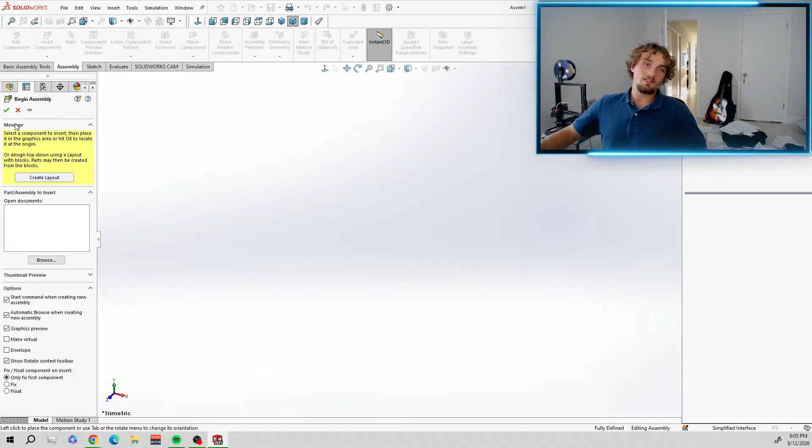Okay, so let's go into assembly. It's taking forever. Let's go into assembly, open it up. Into the assembly, come on. Alright, I don't want to open anything, I just want to open a new file. Here we go, finally, okay we got this open. Let's see, maybe we can begin sketching on the planes and begin assembly. Create layout, open documents, create layout.

Right, for a sketch, right? Sketch, evaluate, and then that's how we do it. See, like, where's the feature to... No, I just ain't seeing it, I ain't seeing the point where you extrude. It doesn't make any sense, and I'm sketching right now. No, I haven't clicked it yet.

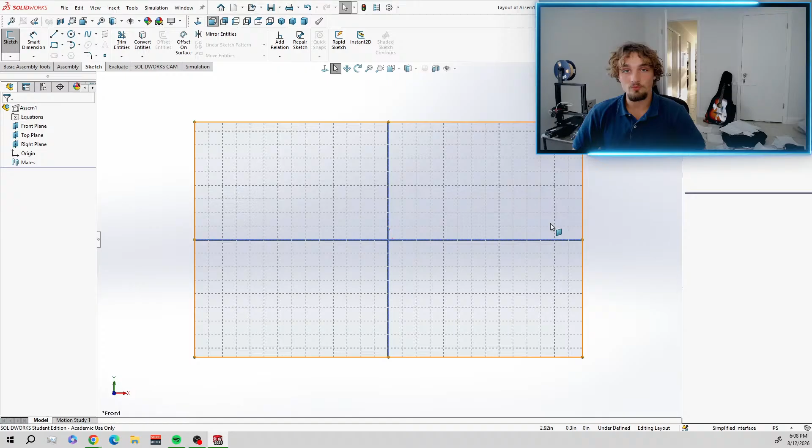Should I separate this part into a build, or separate this build into parts now? Because I'm gonna have to make it an assembly of many different parts, right? Because my 3D printer—I just want to 3D print everything, I guess. It's the fastest way for me to model and iterate. It may take some time, but to go through many iterations, it will be the fastest. Oh man, okay, oh wait, but that's the thing, is that we're gonna do this. Oh wait, never mind.

Holy smokes. What the... in SolidWorks?

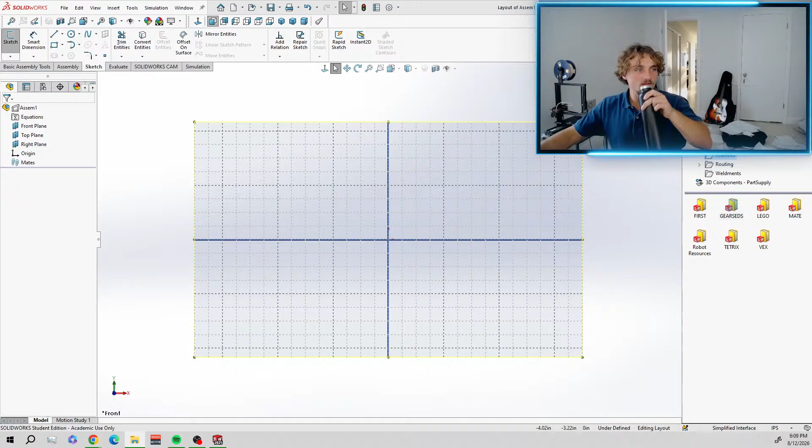Extract all. Wow, look at this stuff.

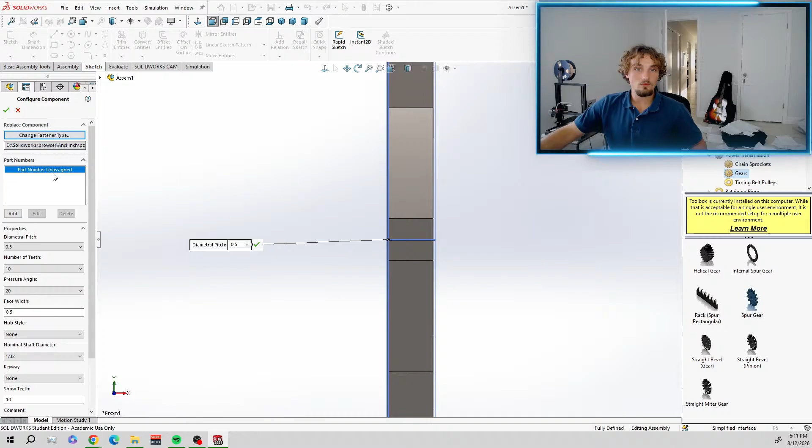I guess I need a body though. Well, then that's what I could do. Configure component. Yeah, okay. I just gotta see if it's gonna save as a part or what's gonna happen here. Yeah, sure, I'll take another one.

See, it's just an assembly, and then we have... see, like, why is this happening? Delete. See, that's what happens. What am I doing wrong?

In the assembly, it's a new part. Give me a new part. Front plane. File, new part.

You guys, make drawing from assembly. Okay, let's ask AI. Come here, motherfucker. How do I make a new part within an assembly? Open your existing assembly file, go to assembly tab in the command manager, click the drop down, blah blah blah.

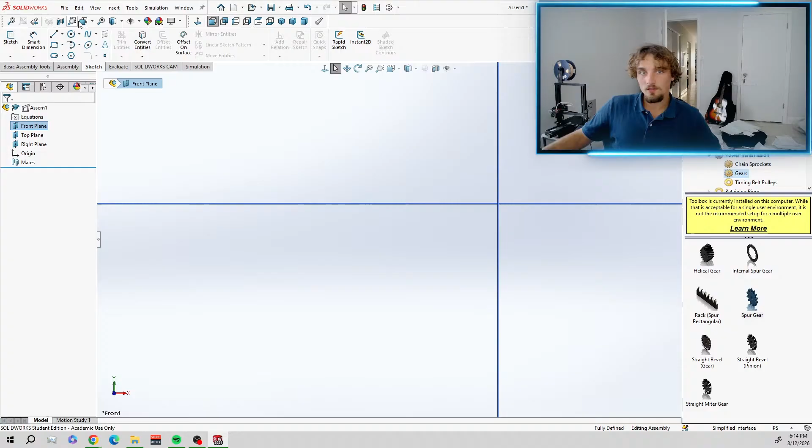Okay, let's give this a shot. Let's see what happens here. So first I'm gonna insert one.

Basic insert component, here we go. Browse assembly, don't mind that. Yeah, that's it.

Alright, now that's it. It needs a part to anchor, and therefore that was our anchor part.

Oh, whoops, that's right up in the mic. My bad. Alright, I'm feeling good now.

I'm feeling good. Okay, we're gonna add this little spur gear up in here, and we're gonna hope that something nice happens.

Look, that's a part, this isn't. What is that? Is it gear? Wait.

Well, okay, let's see what this does. When in doubt, screenshot it out.

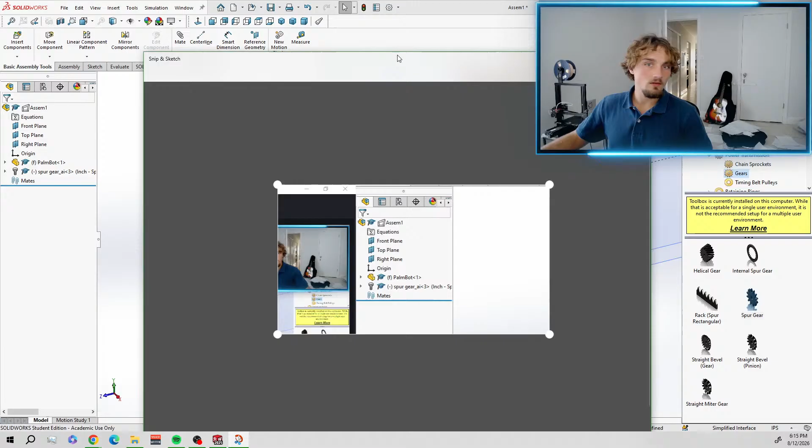Oh no, I got myself in there. Oops, let's just crop that. I don't want to be in there. I don't want to be in the picture. I don't want anything to do with it. There, alright, let's copy that.

Let's take this to AI. Say hello. What's the bolt icon for the gear?

I want to use the, what is it called... the toolbox, and the inch power transmission.

This is a standard SolidWorks toolbox component pulled from the built-in hardware library. Even though your component is a gear, not a physical fastener, the bolt screw icon represents all standard toolbox hardware, including gears, bearings, washers, and keys, to differentiate them from custom parts you design yourself. How to use toolbox.

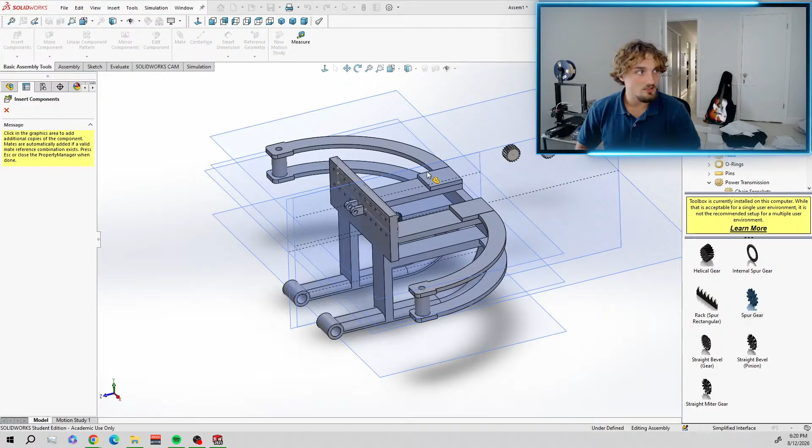Perhaps it's not good though, that's not a good idea for the arms. Maybe I should look to make those out of other material.

Maybe that would be the test, in order to make something strong enough out of a weaker material. Maybe that is the ultimate engineering test. I actually kind of like that. That does seem much more of a challenge.

Okay, we have our gears in here. We need to get to modeling. I don't know why this won't leave my screen. There, okay.

Maybe I should go through some YouTube videos. I have an idea, I have a very good idea. What time is it though? I don't know. I kind of need to get going a little bit, but I also have a very good idea for some new videos, some new content.

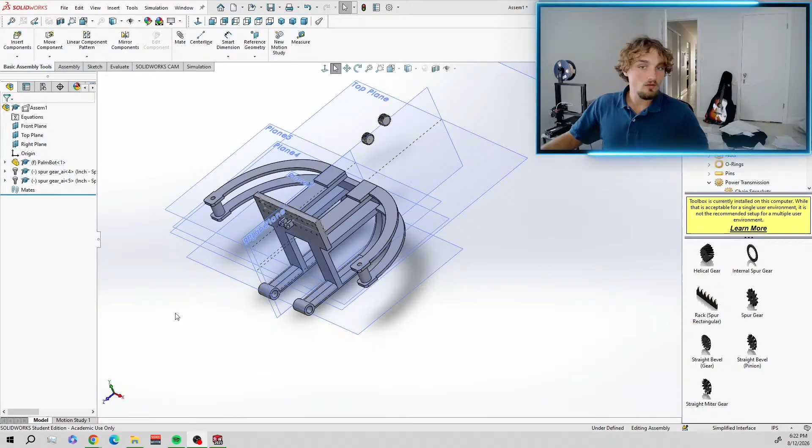Alright, whatever. I mean, jeez man. Let me see what's happening. Nothing. Cooked. Absolutely cooked. Yes, okay, okay, okay, okay.

Alright, what are we gonna do next? We must move forward, we must progress, we must persevere. The helical gear.

We also need one of these. Now this is something that has to be exact. So pitch diameter 12. This needs to correspond directly to the same, well, I guess diametral pitch. Would that be true? I think that would be true. Pressure angle, face width, pitch height, face width. That's probably good enough.

Yeah, we need to. Oh, that is true also. And they've gone missing, my guides have gone missing, my linear guides. That's okay, we'll get them back. But I also made the... trying to think of how I would use the word fallacy in that sentence, but anyways, I failed to separate the parts, the guide from the rail, I guess you could say. So they were stuck together. So when I try to perform like a drag to experience the motion given the constraints, it was entirely the guide was itself, the sled to the rail type of thing, the cart to the rail type of thing. The guide was locked, so it didn't slide along the rails. That was a big issue, but we can correct that now.

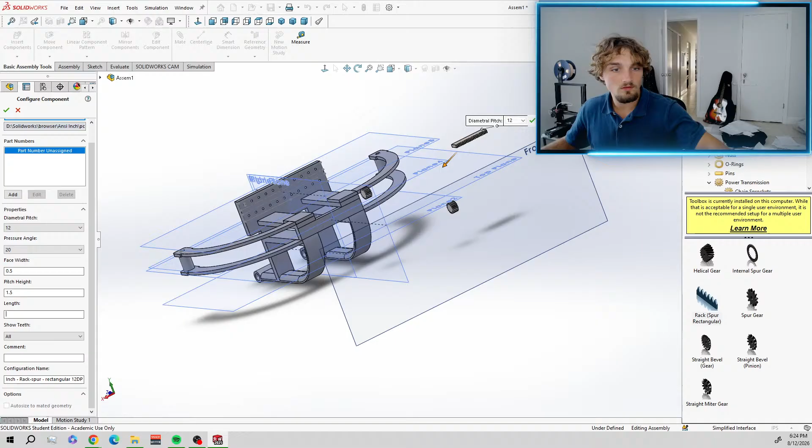Length 6. 12 would be a foot. 18, 24. Yeah, that's probably ideal. Okay cool, I think that's good.

Insert a component. Okay, this is going to be SolidWorks, the internet models, rack and pinion. Rack and pinion, no, not true. Linear guide rail, chamfer, body. Oh okay, yeah. Well technically I need two of those. Guide rail, chamfer. No, that consists of everything, I don't want that. Chamfer. That's it.

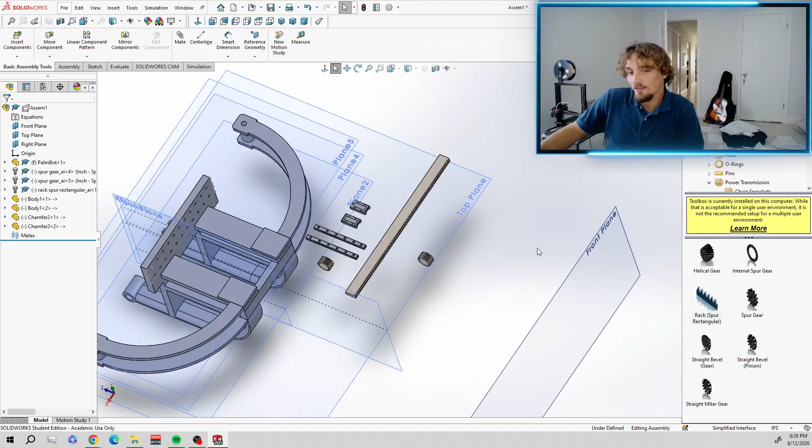Perfect, okay. It's pretty much all my parts. Wait, I think we can get this done, except for the fact that I don't have somewhere for the gears though, that's gonna be an issue. It's okay, I can assemble a part for that, actually, or just build a part. So after we do that, yeah.

We probably have axles here. Pins. Not like that. Bearings. Structural members. Wow, very nice.

I can't at all tell what size that is. Well, what? Oh shit. Did not hang out, didn't stick around. Okay, alright shit, what do we need to do now?

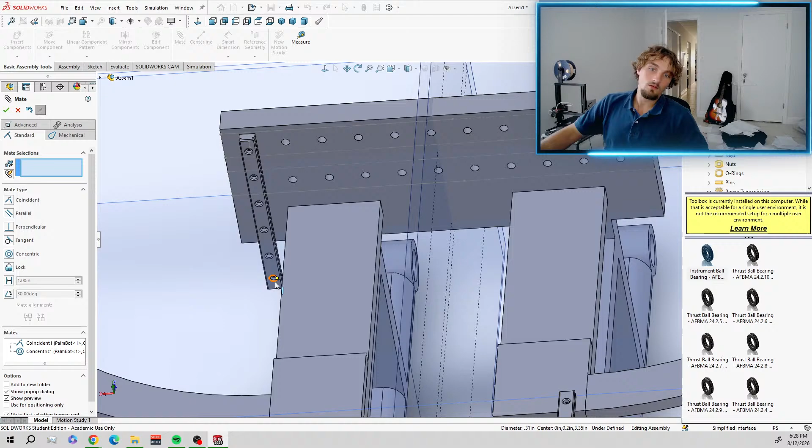Okay, so now I need to make some mates. I can definitely make a mate with this guy. Give me a mate. Let's see, I want to put this face against this face over here, just slap them right together. Yep, okay, I want to put this hole concentric with this hole. Yeah, let's do that, this hole can be concentric with this hole. Yep. This, I mean, I can just simply go this hole with this hole. No, does that work? That works. Concentric, that's good. Bang, alright, perfect.

Time for this guy, mate. Let's do the face, I want to put your face against my face. I mean this face. Dino. I want to check that. I want to make this hole and this hole. Wait, I could do that. Concentric. Do it. Oh my bad. And this hole and this hole. Concentric. Yes, yes, can I not do that?

Yeah, nah, I must have messed up before. Whoa, whoa, whoa, but I can't go forward?

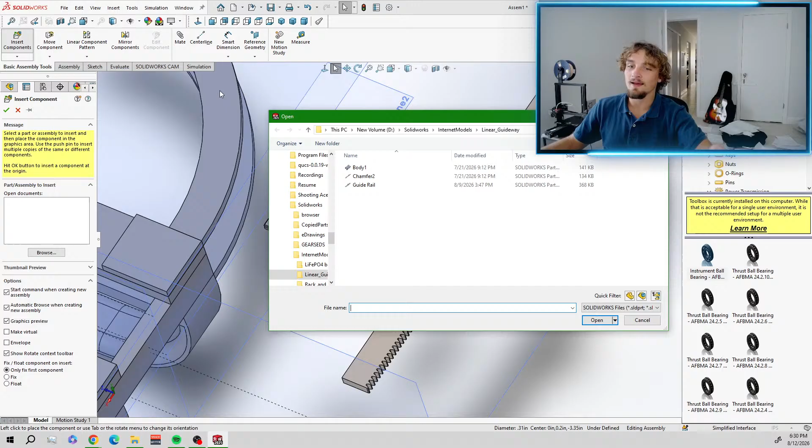Oh, that honestly really pissed me off. That's some stupid ass, that's a dumbass function right there. Why would they even, oh you asshole. Did it again, you asshole. Why wouldn't they even, why would they do that, implement that as a function? Why even have this button here? What's that button for? Obviously not this. What's going on here? Truly, what's going on here? Cat emojis, not the time, not the time right now. Shit, you're gonna put me in the loony bin, you're gonna make them put me in the loony bin. Go crazy.

Alright, well I fucked all that up, so let's get back into it. Let's try again. Not insert component, bro. Nobody wants you, nobody wants you. Alright, first we gotta put their face against my face.

Okay, I like it. Let's take a look at this guy and we're gonna put his face against this guy's face. Okay, I like it.

We're gonna hit this check over here just to verify. We're gonna make this guy concentric with this guy over here. Okay, I gotta move over here now. Let me pick the selector.

Let me hit the escape button. I don't know how to get back. There we go. I'm gonna make this guy concentric with this guy. I'm gonna hit the check. I'm gonna make this guy concentric with this guy. Shit, I hit the face. Get back to the mate.

Like we're from down under, mate. Oi, cunt.

Oh, what? Concentric, please. Please. I wasn't done mating.

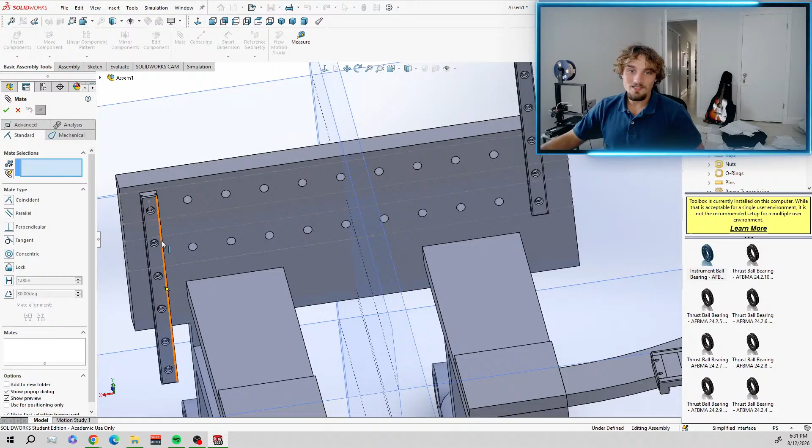There we go. Now it's looking very good. Looking very good.

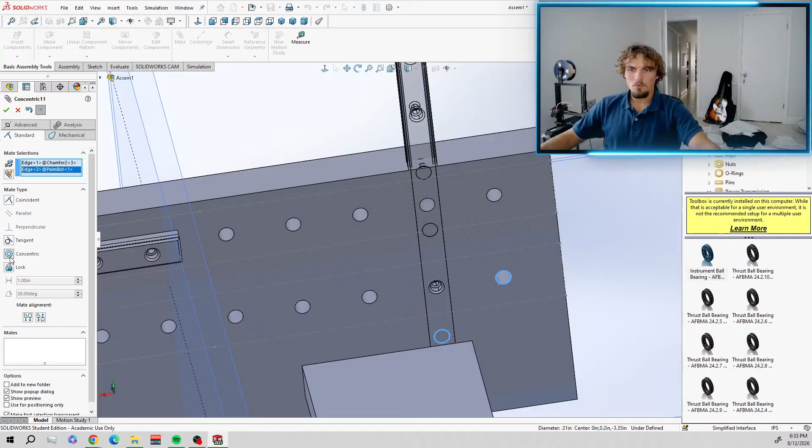Give me concentric. I want to go concentric. What's going on? How did it move into there? I'm so confused.

You gotta go. You're being weird. You gotta get the fuck out of here, mate. You're being weird.

Okay, give me another chamfer. Chamfer. Give me another one. Well, how many chamfers is it gonna take me to get to the center of this problem?

Yeah, just be concentric, bro. It's not a... he flipped all the way around. This motherfucker is crazy. He flipped all the way around.

Right? That was, yeah. Alright, let's put this guy concentric with this guy. Okay? Right, concentric. What the fuck? Wait, is he... he is concentric. I just did not see it. He is concentric.

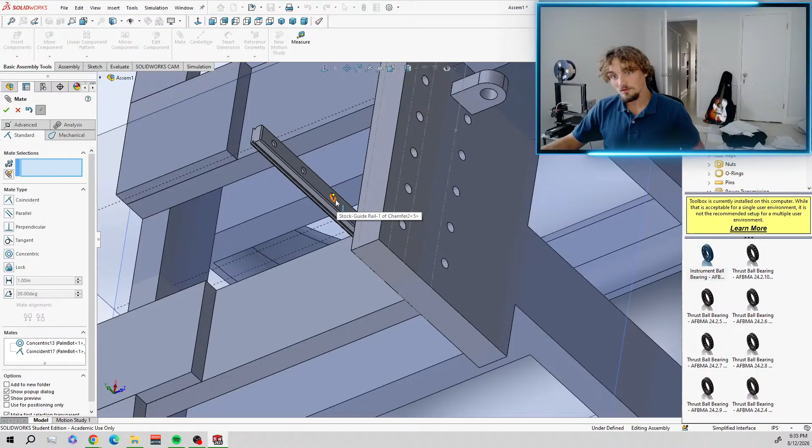But I'm kind of sick of this problem. It's taking me forever. Okay, so there should be absolutely no problem for, we'll even do the backside. Maybe this is our problem. Let's do the backside there. Now that's 1, 2, 3, 4. Give me a concentric.

I don't get it. What? It's off? It can't be off. I did this before.

Unless I did it reverse. Perhaps that's the issue. Yeah. But still, how could it be? That still wouldn't make any sense. Let's give it another shot.

Holy smokes. Can't believe this is taking so long just to do this one thing. Chamfer.

Alright, let's make a mate. Let's do it on the top side this time. Yeah, you gotta put the face against the face every time. You have to. Otherwise it does stupid stuff.

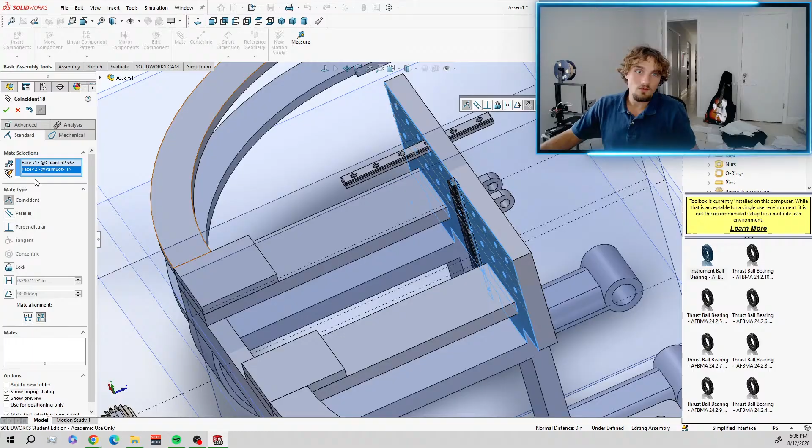Wait, is it already doing stupid stuff? Not really. No, it's good. Okay. Please, brother. Please. Concentric. Okay, so far so good. No. Oh, yes.

Yes. Alright, let's give this one another go. Ladies and gentlemen, welcome to another go. Looks like we're going to have another go at it. Welcome to another go, ladies and gentlemen, we're going to have another go at it.

I just want just the outside circle. That's it. Don't gotta do too much to please me. Low maintenance, you know what I mean? Low maintenance. Give me concentric.

Yes. Yes! Alright, that was our problem there. That was our big problem there.

So now is this fully constrained, that I can't move this in any direction? Absolutely, that's a mate. So now I want to, can I move him? Not really. You could just say move component. I just want to get everything kind of closer over here.

Oh, there. Why is this difficult to get a grab of? What?

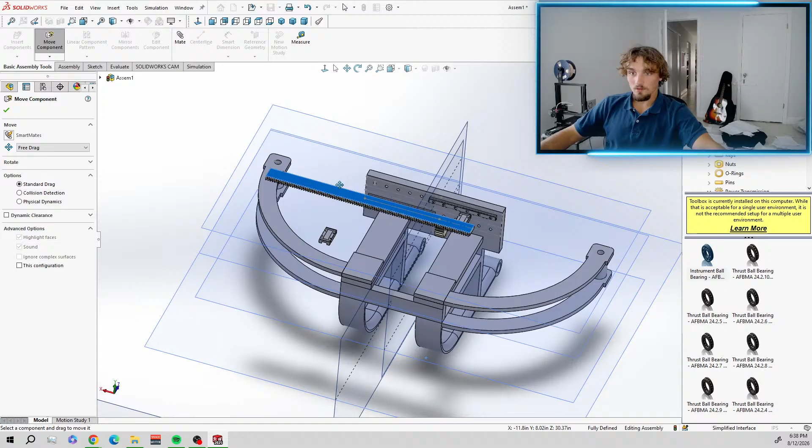Did one of these. I needed what? Why did I do two? There we go.

That could definitely happen. So we can make this mate here. This guy too. Yeah, how would I center that up though? Oh, it would be this guy also, right?

Wait, what? That didn't make sense. Does it? That's also a possibility too. Maybe we should roll with that though.

I'm thinking about two topologies or two orientations of the robot. And this might be a better one actually.

Yeah, and it's connected. But shit, we're gonna need to put holes in this thing. We gotta build a mount for it. I really have to. I have to do that.

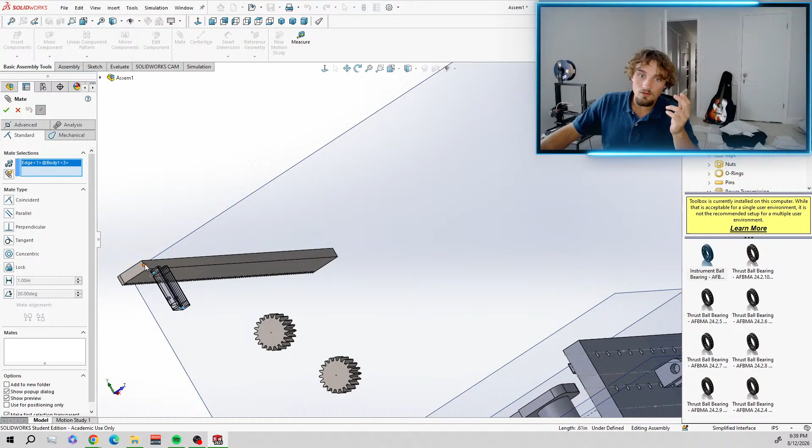Unless... shit. This thing really doesn't like me.

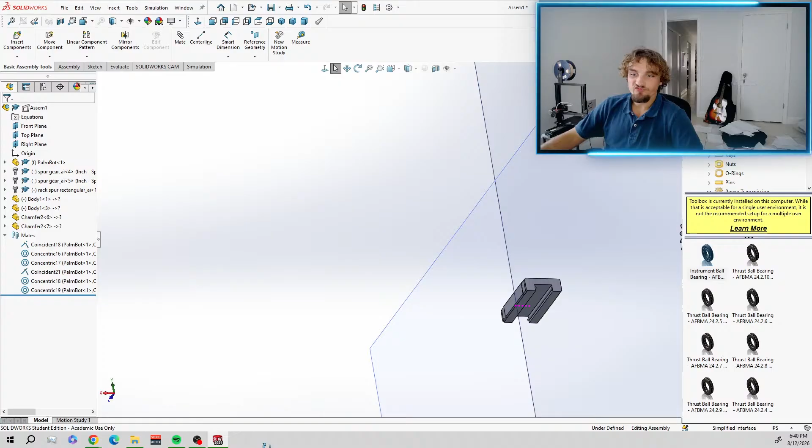I want to see how we can slide this then.

Where is it? There it is. This thing doesn't make any sense though. What are you doing down here? What are you doing down there? How does that make any sense? I literally put these two coincident. Like, what? Bro, I don't know what to do about that.

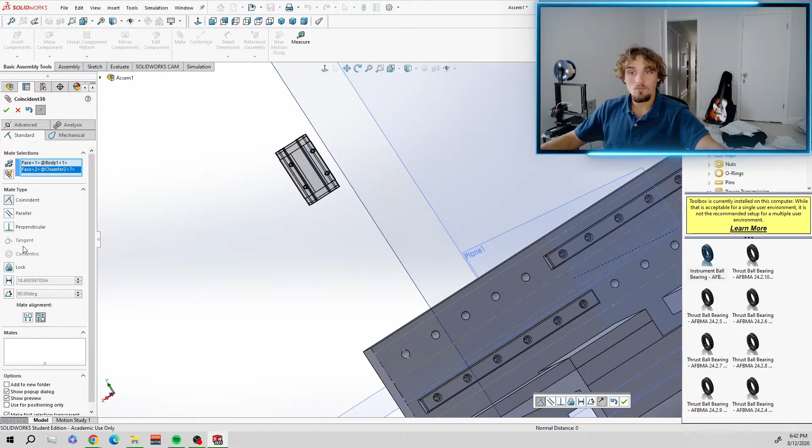Maybe try that. Let's try this. Do I have to get it close? Do you guys know in the chat? Do you have any idea what's happening right now?

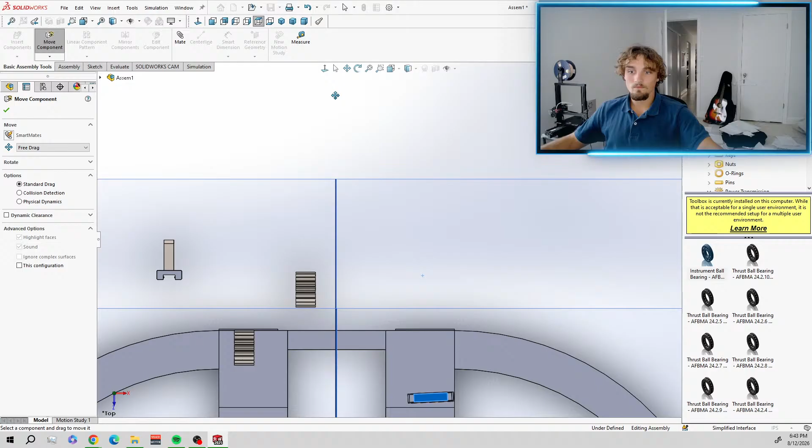Drag it there. But we should better define it. What the? Why does it look like that? Still doesn't really look like it fits, does it?

No, I lost it all. It crashed. Well, this is a mess. Are you kidding me? Man, I should probably just go to the gym and call it a night. You know what I mean? Bro, get out of my face, get out of here.

Ain't nobody got time for that. What would you call that one? Alright, I don't know, let's open it back up. I lost everything, I didn't save. I never heard of saving. Alas, here we go.

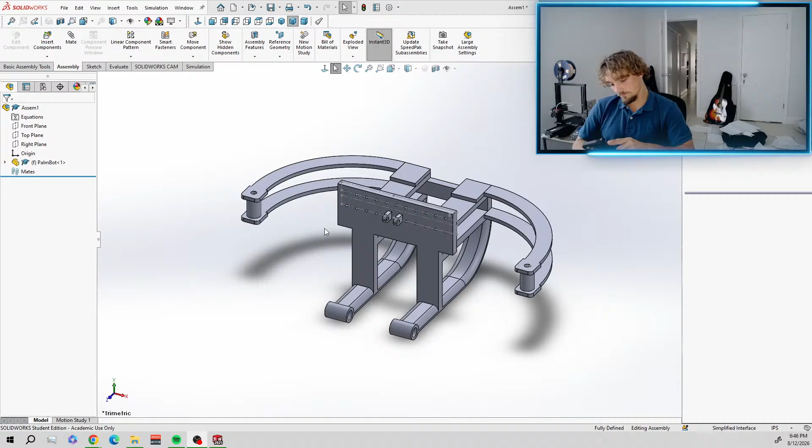Okay, are we good? Are we going? Alright, we're live. Okay, alright, let's just redefine everything, give it all its constraints and everything again. We're just gonna do it all again, but we're gonna try to do it better this time.

So I don't want any of that SolidWorks internet models. Linear guide, rack and pinion, linear guide. I mean, I could also use the rack and pinion. No, but I don't want to. Chamfer.

Right, I can also begin to do that. Insert component, let's do it again. Chamfer. Yeah, insert component, okay, nothing else. Now we're gonna have to go back to toolbox. That's what it was. Toolbox, now we're gonna go back to toolbox.

We're gonna take a handy dandy note from our, we're gonna get in the toolbox. Alright, we're gonna go digging in the toolbox. We're looking for power transmission, and I want the spur gears. Alright, oh yeah, we gotta drag it. Click and drag. Whoa! Did it stay in my dimensions I set earlier?

It totally did, that's amazing. Yep, come on buddy. Alright, that's enough for me, I'm full. Let's see, let's get some rack spur. That's perfect, I want 2 of those. Got another one.

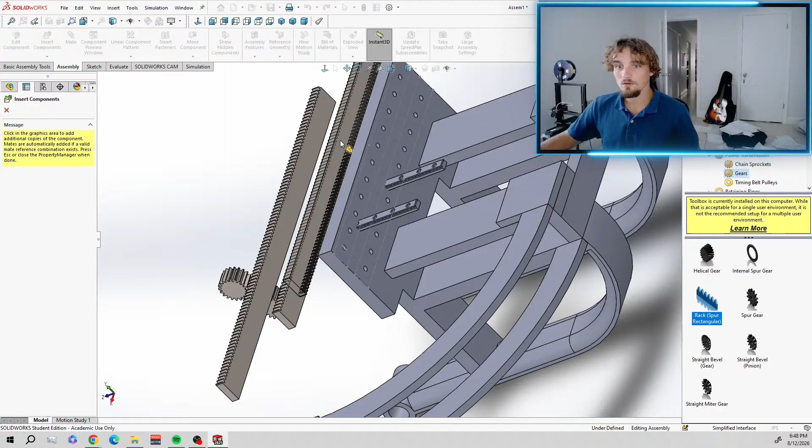Yes. Whoa, whoa, what's up with all that? Okay, whoa, I didn't know it could do that. I don't know what's happening.

Oh, I didn't do the... hold on, I didn't insert one of the components. This one, the body, I need 2 of these also. Insert component, give me a body. Bang.

Alright, let's try to establish some mates without things going crazy. Mate. Oh, look at that, let's make sure it does what I want it to do. You got... whoa, wait a second. Whoa, hold on. Did we establish that mate? No, it's gone, hold on.

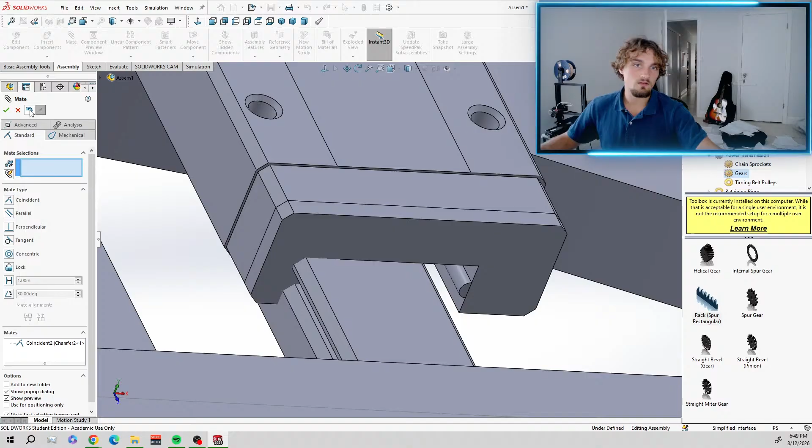It was almost doing exactly what I wanted it to do, what I needed to do. Okay, alright, we gotta add another constraint though. So let's get really close. Yeah, we can just do that guy, that guy, do that guy type thing. That guy face and that guy face.

Oh no, delete. Oh, let's do more, like, yeah, that guy face, that guy face, that guy face. Whoa, what the, that didn't happen before. Bro, how the fuck did that happen? Okay, that guy face and I think that guy face.

It's not working, why? Didn't work. That doesn't make any sense. I need to see through the material. Oh shit, I don't know what I'm looking at. That's not helpful. That's not helpful either.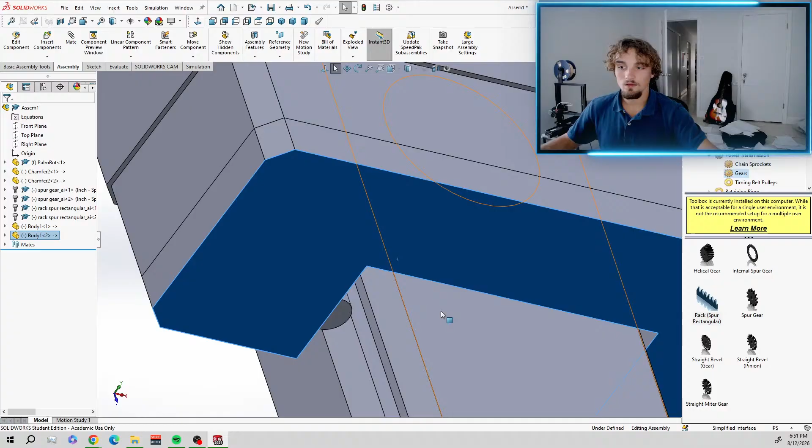Why can't I pick those two? What the, bro, what? What else was picked? Mate. Nothing.

Oh my gosh, so difficult to see around here. Yes, thank you, thank you. Yes, thank you. Wait, that actually might just be perfect. Let's see if we can get this done now.

I just want to see the circle under it. Isn't that crazy? I just want to see it. Okay, that's the first one, yeah. That's good, we need him against him. That's not good. Wait.

Nope, we gotta get rid of this one. Delete, my good sir. Delete. Thank you, my good sir.

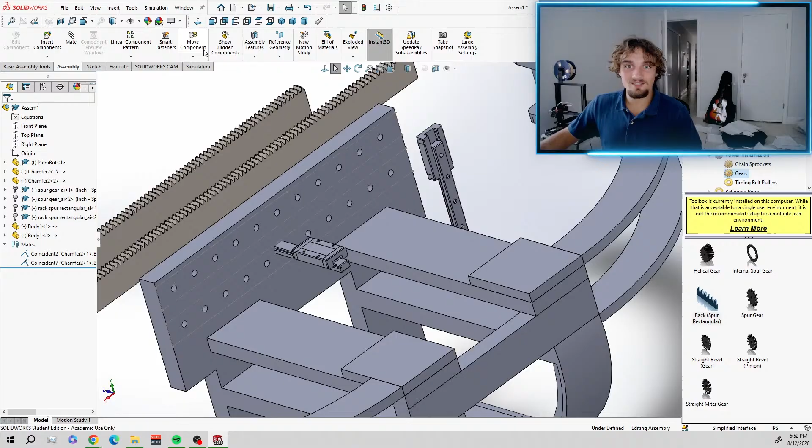Now the next constraint of choice would rather be this circle, concentric with the circle. Now, as they are, perhaps when we mate here to here, it will flip. And it did not. The alignment was reversed to prevent mate errors.

Oh, I'm so not liking the outcome of this. But that might be okay. Sorry, I'm acting stupid, I don't know guys. I'm on some other shit right now, you know what I mean?

Please. Please, no. What the? Oh my gosh. This doesn't make any sense. Delete. Yes. Mate.

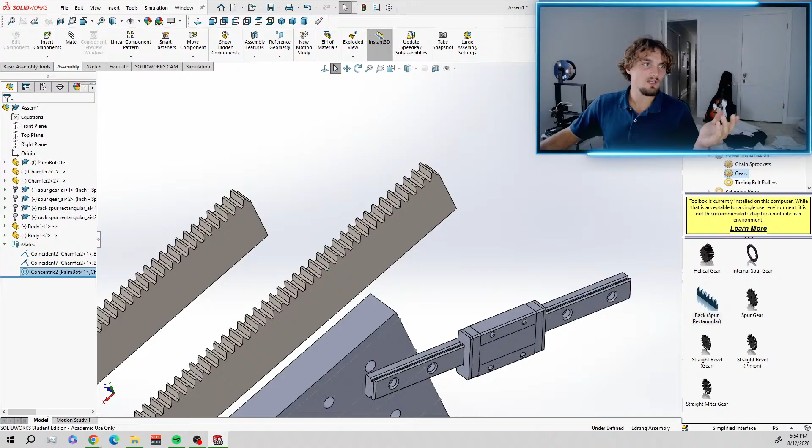Let's get rid of that constraint too. What the fuck? What is that? You see the way it's moving? You guys see the way it's moving right now? What the fuck is that? This thing don't have any other constraints, right? What? Whoa. No, yeah, that's that. That's different.

Wait, yeah, that whole thing and that. That's good, I like that.

What the, okay, okay no, that's fair. I didn't set the first one. That's fair. Alright, so can I go ahead and set that one now? Or there we go, go ahead and do that one there now. Keep that one concentric there. Okay, good, cool. Now I want this one, and I want this one concentric. Why? Fuck, why?

What kind of way is this thing? Look at that. What the? Okay. Okay, sure.

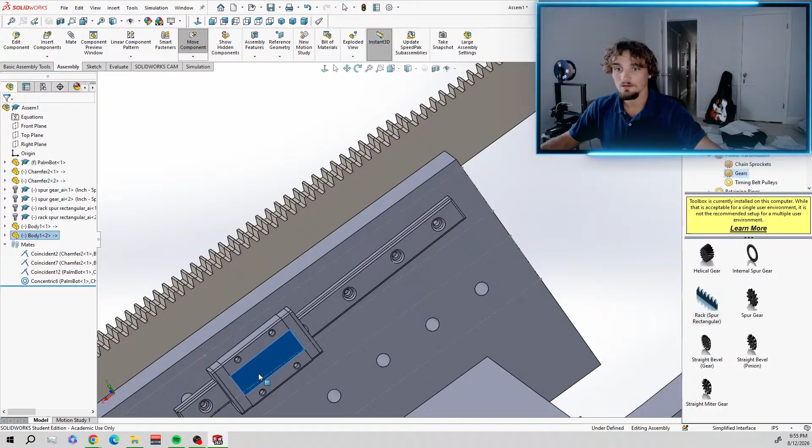It's not lining up, what's going on? Does it need to be flipped? Is this the problem? That could matter. It's so weird.

I don't know, I'll try to resolve that later.

Nice, wow, okay beautiful, that's great. Okay, bang bang, look at that. That's amazing.

Okay, now I want to see if I can get him on there. But it's just not, I need to build, I need to design an attachment or an adapter from this guy to this guy, because he's going to slide on here. Oh yeah, and then I also need space for, oh my goodness okay. We can design that real quick actually. No, this is fairly good. This is really good, alright.

Man, I barely ain't got nobody. Alright, give me 1 second, I'll be right back.

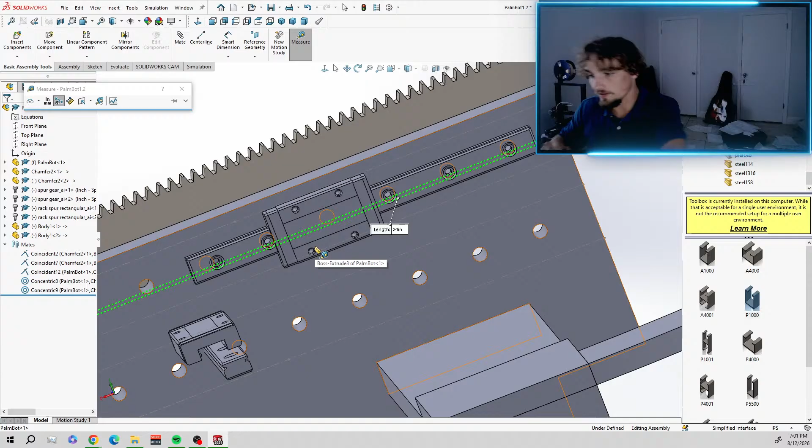Okay, alright let's also draw it out, because I'm not going to remember everything.

Freehand ain't looking too good. Oh, you're not seeing it? Hold up, let me switch.

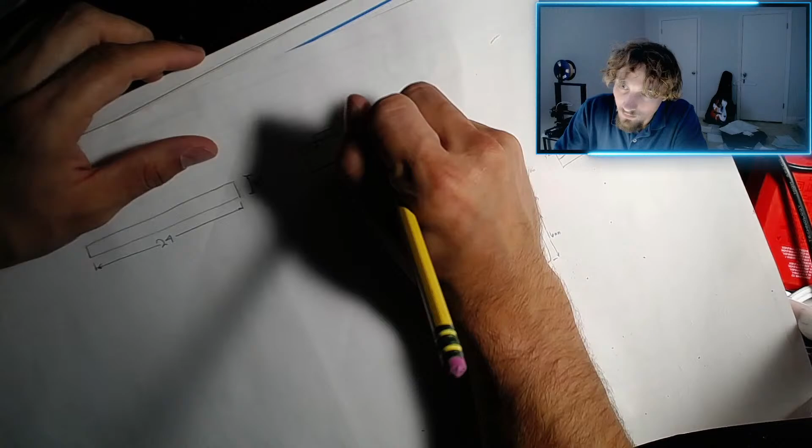Okay, plus or minus 0.1. Actually, let's put these tolerances because let's utilize this when we make the 3D print. Well, I guess, but it's not necessary for this. Or is it? I mean, I could actually print that. So shit, maybe it is applicable. Let's try it.

What's that? 0.98? Oh, it's all the same. Okay. We got the tolerance, so I ain't gonna write it down. Alright, fantastic.

Just kind of like that's pretty much all that's needed, right? Because then we're just gonna center it up on that 0.05 or 0.5. Wait, that's not enough though. Oh right, that's why we're gonna make the whole thing.

So I do want to know this. What the? What? Wait, what? So that's so I got some weird angle or something? No?

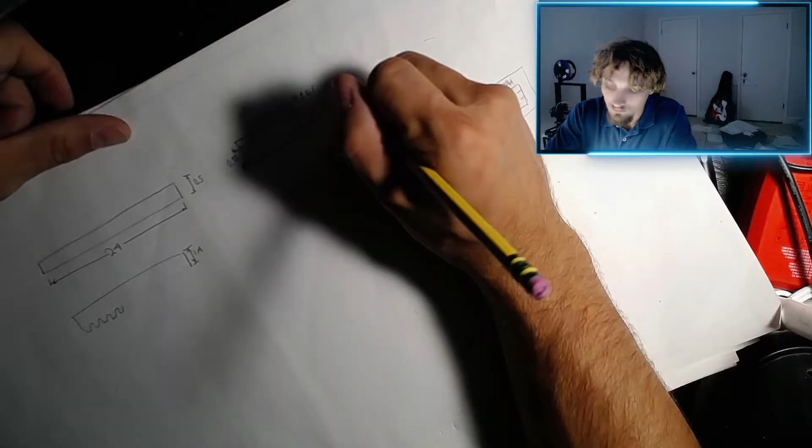Why doesn't this have a tolerance, eh? Okay, yeah, I suppose that's good enough then. Yeah, I guess I do want to know how big this is. 1.71. 0.18.

Yeah, we should make the platform that big. We should make it touch there, and then we'll connect that to that. How though? How should we do that? Okay, so we're gonna connect that atop the cross of here, and we can pretty much define this to be whatever. I mean, it's 24 inches long. We know that, so we can come off of here. So let's draw a close up of this, right?

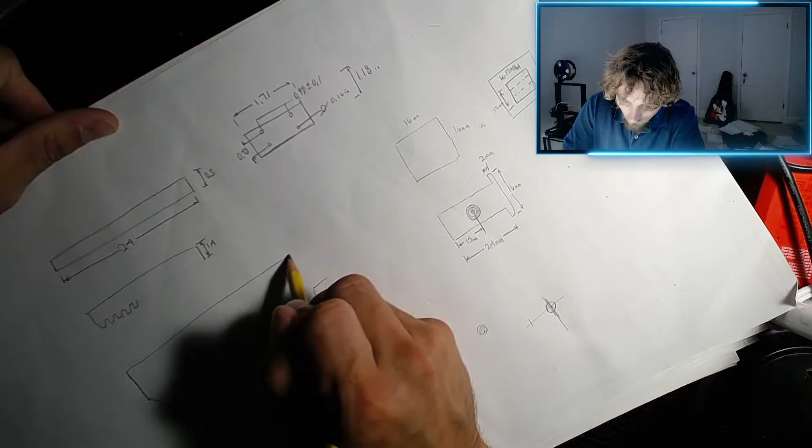Like whatever, right? So on here, from the top, will come like this. Yeah, like that. So, and then we'll have two screws or bolts through there. Um, yeah, yeah, should be. So it's gonna have to be like that.

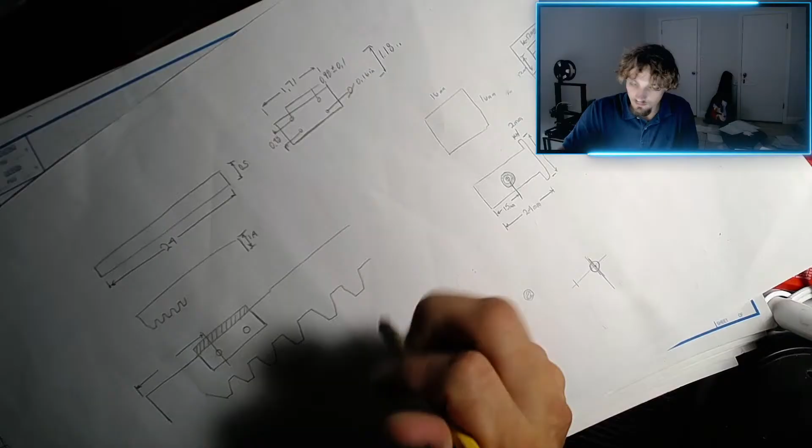24 inches here. We could start in a little bit. Let's consider it 4 inches. No. 1.5. 0.7. 1.18. Well, that's really that way. That's true, but this isn't absolutely true. What do we have? We have 1.4.

Yeah, I should figure out the distance also between. Gets crazy. Let's try to do a smart dimension, and let's get a distance between these two edges. Him and him. 0.19. Yeah. 0.19. Okay, very well.

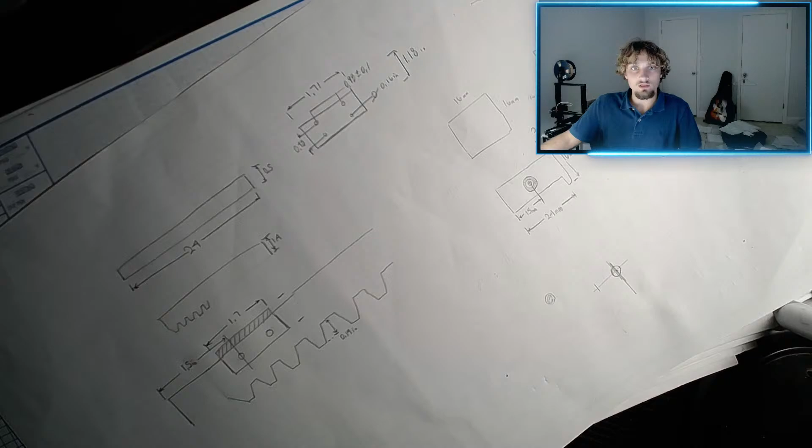Okay, I think we have about everything we need, so let's do a new part, and then we're going to insert this part after we create it into this assembly file again, and then we'll put everything together because we'll have all the information we need to create all the constraints necessary to achieve the mechanical function we desire.

Oh man, there's more that I must do though also. We can consider that after, I guess. So let's do this first. Extrude boss base. We'll start with the top plane. We'll make this undetermined. So 0.19, we have 1.4 minus 0.19, let's call it 1.2. Let's just make it 1. Just make this 1 inch.

It is also going that way. Let's call it 1.2. Because what's the thickness of that, really? I don't even want that to be an inch. Quarter inch, 0.25. Quarter inch, is that good? That is good, 0.25.

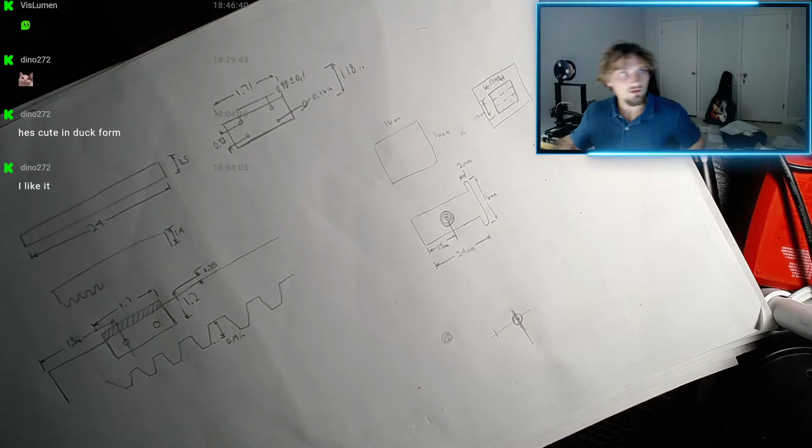So 1.5 inches into the first center of this hole, the hole diameter is going to be, I guess it's for me to decide. And let's make that also a 1/4 inch. So is that as well.

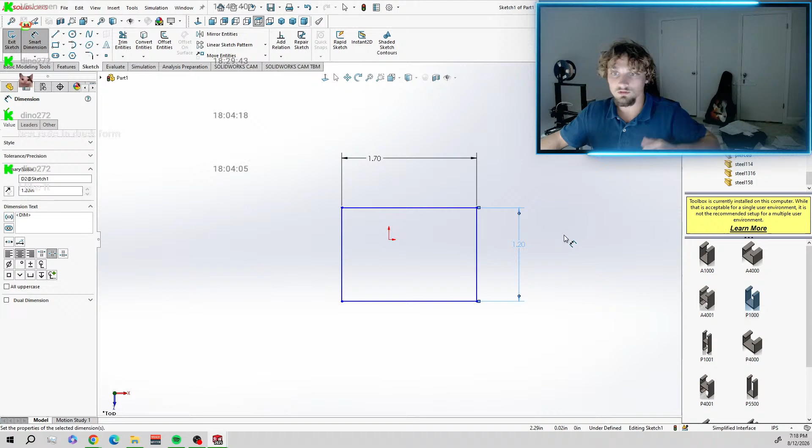Okay, I like it. Alright, let's make it. Okay, so this. Yep, I like it. Rectangle. Bang. We're gonna make this 1.7 inches. This is gonna be 1.2 inches. Okay.

I like it. The thickness, a 1/4 inch. Is that too much? 1/4 inch. Let me take a look. Oh man, where's my protractor? Nah, that's good. I like it. 1/4 inch. 0.25 inch. Nah, that's probably fine. That's not too thick.

Oh shit, 185. Oh no, I forgot what an eighth is. I guess I can look it up. One divided by 8. 0.125. I'm an idiot. I'm absolutely, utterly an idiot. Alright, 125. Check.

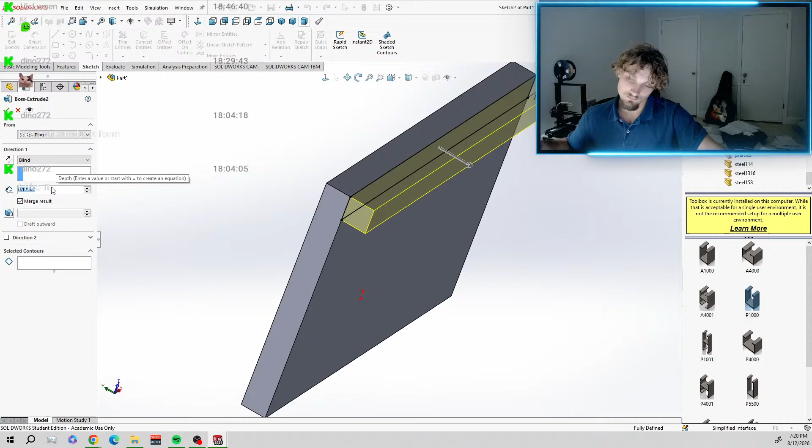Right, so what the heck was it? 1.18. 1.18 minus 0.125. 1.055. Should be in inches. It is. Yeah.

Yep. Okay, now we just need to put some holes. Extrude cut on here. I'll do a linear pattern. Circle, yes. Smart dimensions. 0.25. No, these are the actual holes, which have a diameter of 0.16.

Oh my gosh, I didn't measure how far they were from the side. Well, I guess I could just divvy that up. Depending upon 0.98. How wide is that? Oh shit, 1.7. 1.7 minus 2 times 0.98. Well, wait, yeah, that's not what I'm thinking. 1.7 minus 0.16 times 2. 1.38 divided by 2.

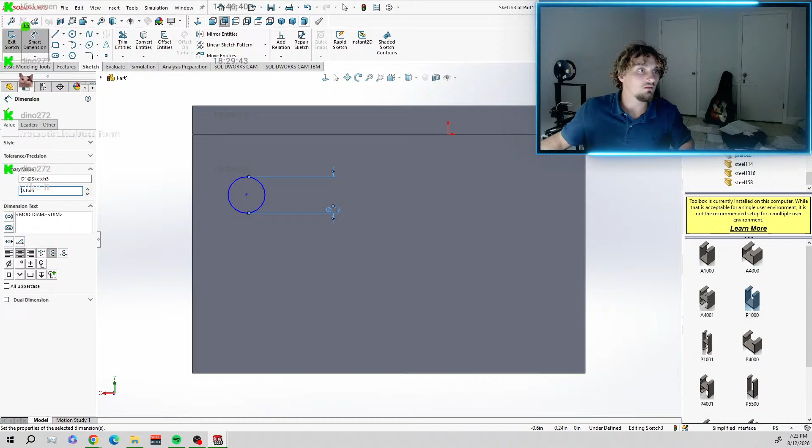That's not what I want either. One point seven minus 1. Holy shit. 7 minus 0.98. 1.7 minus 0.98 would be all that space. So 1.71, shit, 1.71 minus 0.98. Right. Minus 0.98. No, 0.16. 0.57. So 0.57 on this side, 0.57 on that side.

It seems that way, but that must not be true. Because let's see what happens if I do that. 0.23, yeah, 0.57. So then 0.57 divided by 2, 0.285. And then same thing from here.

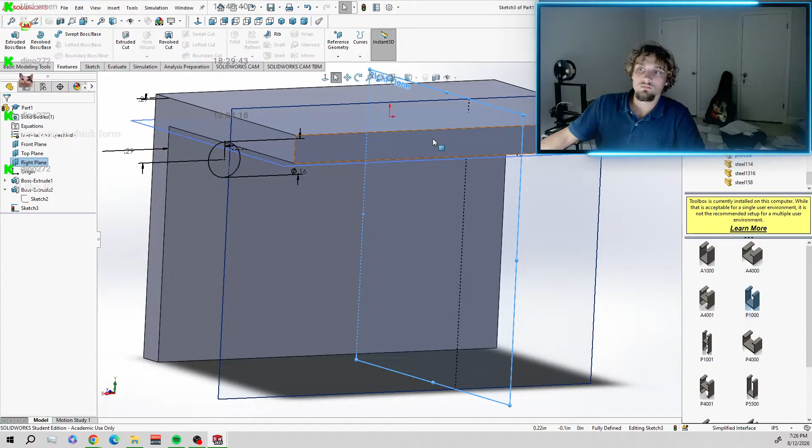What? What is happening? That's never happened before. Reference geometry. Why is it acting like that? What the? I'm so confused.

Extrude cut. Wait, not even that either though. No, I do need to edit this sketch. Bro, what's going on?

Still in the sketch, that's why I can't do it. Linear sketch pattern, direction x-axis.

1.7, divided by 2, plus... wait, or just offset by 0.98. Okay.

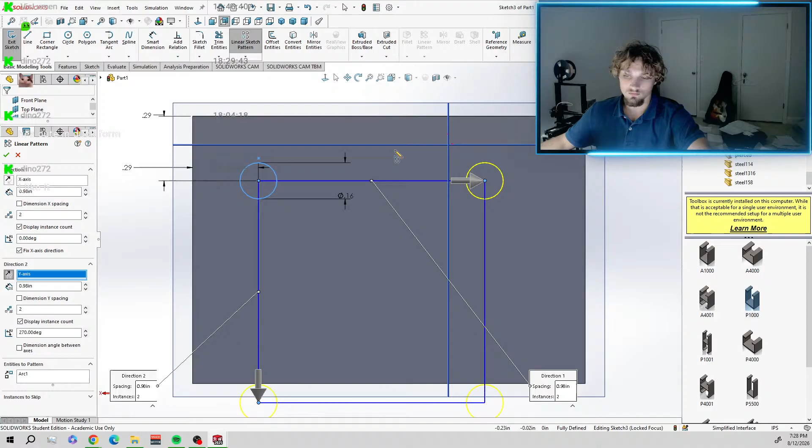What the? Yeah, that is very close. It doesn't make any sense.

Okay, let's do that, but then let's come back to that. And let's go back to this, and let's edit that feature, and let's make this longer, because what the shit.

1.1. Is that even enough? 1.3? I don't know, 1.3. Check. Yeah, I like it.

I can't pick all of them. Wait a second. There we go. Through all.

And we need a chamfer on those, buddy boy. We need to hide those screws. Sure. Works for me.

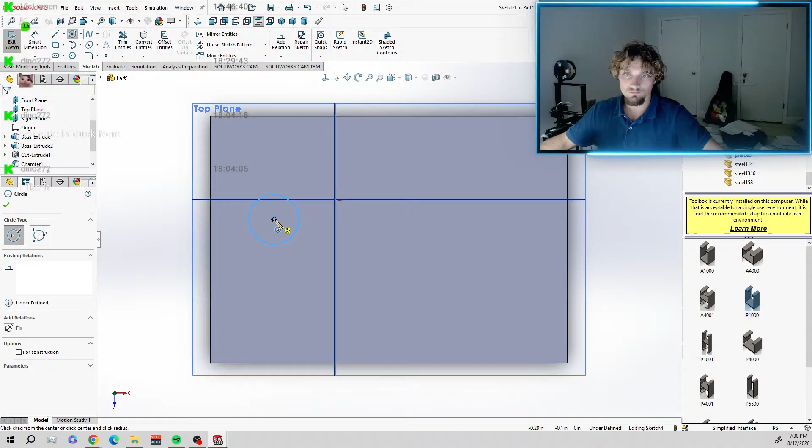One point two divided by 2. 0.6, obviously. 0.6.

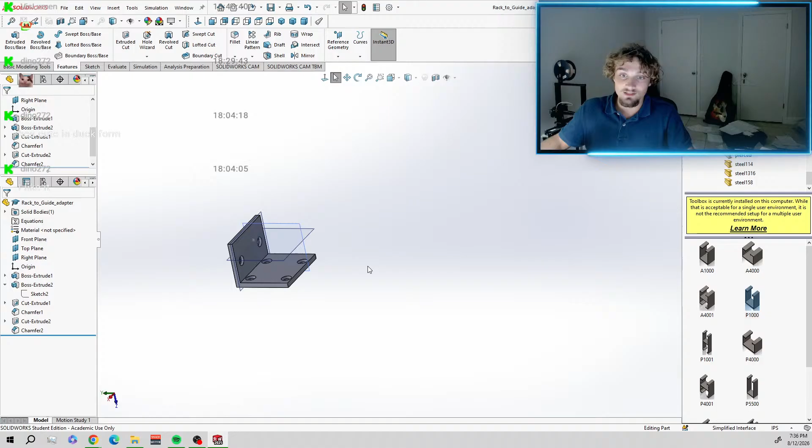Which, these are way too tight to the edge. This is absolute trash, fucking trash. I have nothing left. Are you kidding me? What am I... I mean, this is seriously some bullshit.

I'm so good at organizing files, and I lost the assembly. It's gone. I don't even know what just happened. I simply try to make a mate between this one and the other one, the last one, the assembly. This is ridiculous. Gone. It's just fucking gone.

There it is. I got it back. Okay, cool. Alright, let's make these mates here. Alright, we're gonna get everything together now.

Gonna choose that face, and we're gonna touch his face. Coincident, perfect. And then we should be able to get him.

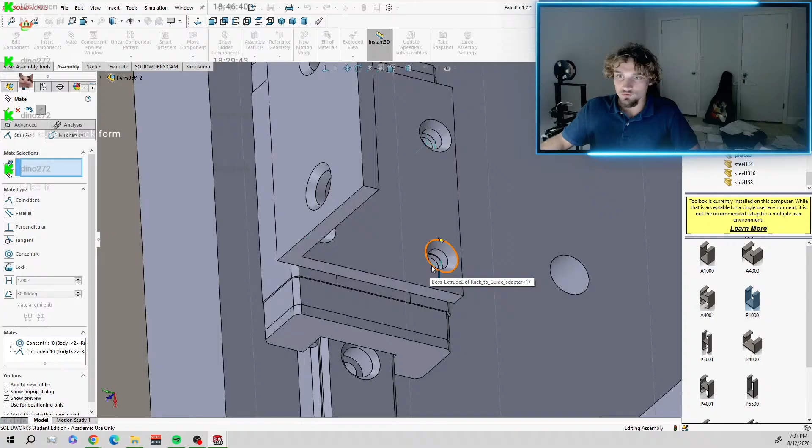Whoops, I don't like that one though. Not that one, guys, the other one, this one. And that little guy in there. Yep.

Concentric. Beautiful. Oh, you fucking asshole. What's gonna happen if I move him? Nope, nope. That's why I need it to be concentric, guys. Because I don't want it to rotate like that, right?

That was never the intention, okay? So why can't he just be concentric? I did the exact dimensions. It's perfect.

Did I choose the wrong hole? Where's the right hole? Is that it? It won't do it, guys. Why is it wrong? It's not off. That looks good to me. What's the problem?

I don't even know what I'm looking at. What?

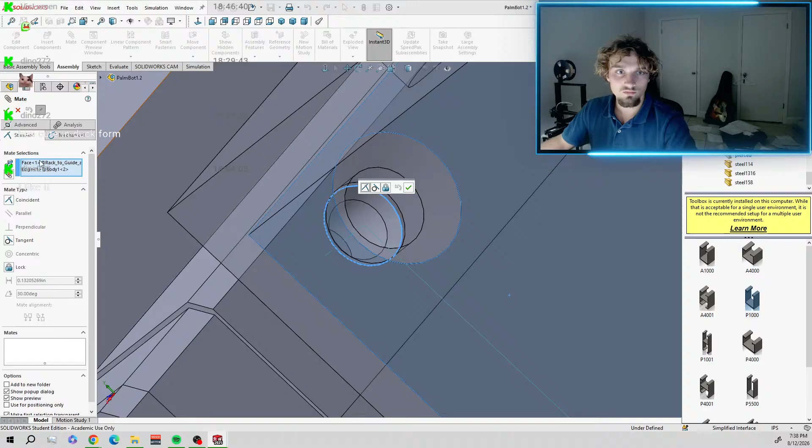Alright, this is really gonna be the most difficult part right now. Is to get these two to mate. There it is. Give me concentric, please. Why?

No, not yet. Maybe I'm picking the wrong one first. No, I still picked him. Can I see it? Yeah, that must be it. Let's try picking him first.

Huh. Okay, fine. Well then. Parallel. And that should be good.

Bang. Okay, now we got a gear in motion thing. We got a linear guide. Ha! Nice. Sorry, guys, we got a linear guide right here. Look at that. And our adapter is good. It's perfect. All right, it's beautiful. Look at that. Okay, now we're going to...

Oh, we got to put holes in this guy, though. Can I do a sketch in here? But I don't know how to do that. I don't think he's saved as an independent part either. So let's find him, let's try to save this as a part.

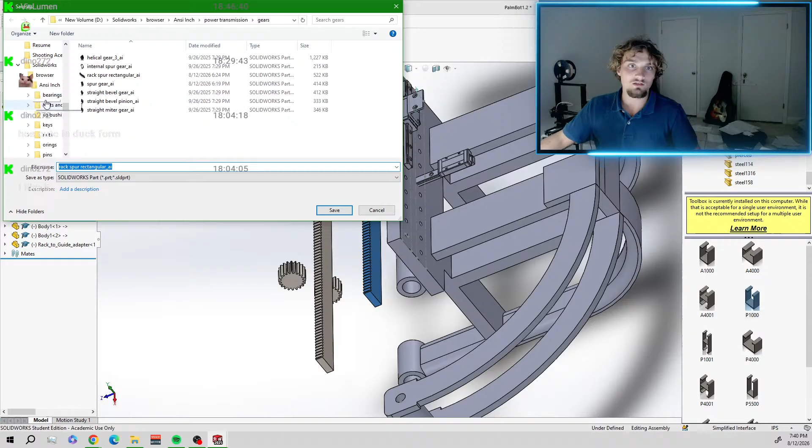Save component, new name, okay. Where are we gonna save it? Gears, let's save it in our projects. This is our rack spur gear. I like it. Alright, we can open it up.

Let's just go to this guy. Just gonna open, not drawing, shit. Open. SolidWorks, projects, Rackspur gear. Open it up. Cool.

Okay, we're going to extrude cut. Okay, we got this face. We're gonna put some holes in this guy. We're gonna put some holes in him. And again, according to our specifications, right? So we'll go.

Okay. This is 1.5 inches. We'll make this hole 0.25. We'll make this... what is it? What is it? 0.5. Wait, there's no way.

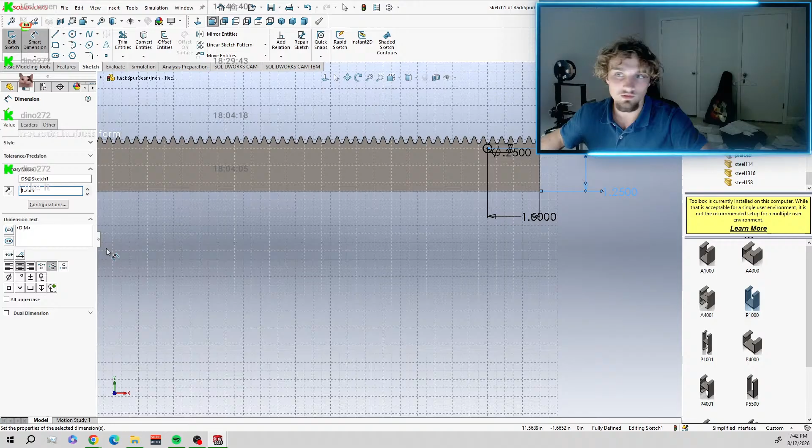1.5. 7.5. I'm fucking up really bad. Wait. I need this to be very particular. Ah, shit. Shit, I have to go back.

It's hot as shit in here. Okay, what side are we on? We're on that side, so that's gonna sit against there. Okay, oh shit, okay.

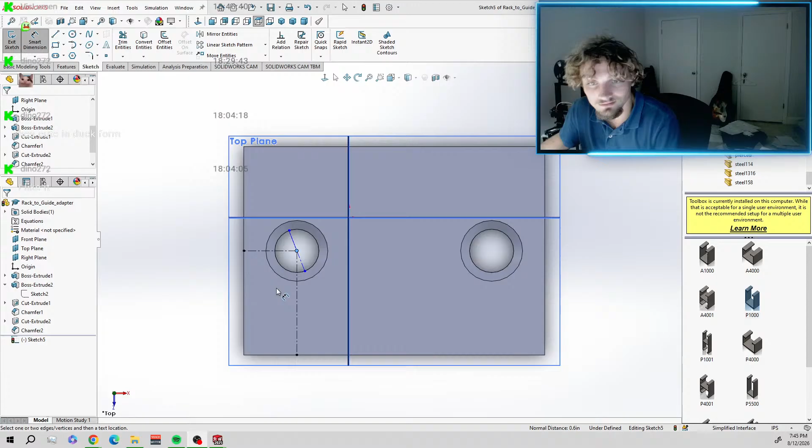So it's that distance, it's 0.6 from the very back, and then we gotta account for this difference, which is the thickness. It's 0.25, no, we made it 1/8. Yeah, but why doesn't that look the same? Actually 1/8. Why does that look... yeah no, that does look equivalent.

Okay, so I think we have everything we need. Let's go back. So what cut extrude? What are you talking about?

7.5. We want this to be 0.6 minus... yeah, 0.6 minus 0.125, 0.475. 0.475. Alright, and that should do it. Okay, we did that, alright, perfect.

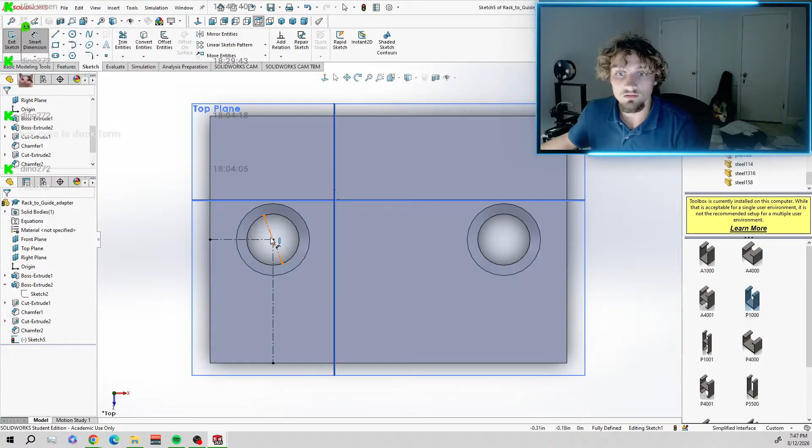Okay, and then ideally we would thread them, but I don't have the means to do all of that. Okay, so file save. Now we're gonna have to import this part. Save, let's go back to the assembly, and then we'll import it.

Oh, it's saved, would you like to? Yes, oh nice. Okay cool, so alright, let's try to get that there. Except, no, that's fine, yeah, we can't do it that way.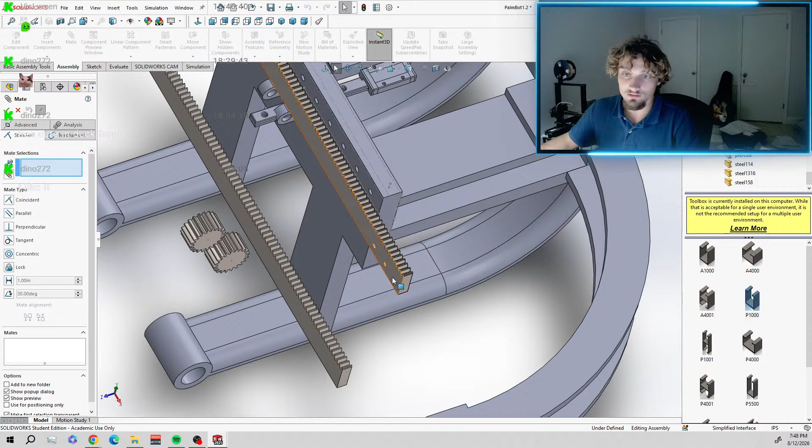Okay, so in the assembly, we're gonna make some mates. Let's see what happens if I do that face to this face. Okay, that's just so silly.

What if I did that face to this face? Bro, are you for real? That's how it's coming out? That's a fucking joke, honestly. Forgive me for my language, but that's a joke. Alright, let's get rid of all that.

Let's rotate this object and get it as close as possible. I guess that's the real key, rotate component. Just go back to... okay, go back to where you were.

Let's do another rotate, but let's get a face. And we're looking at this guy. Yeah, what the? I can't believe that happens too. Why'd it have to take me all the way back though? Fuck, I'm gonna lose it.

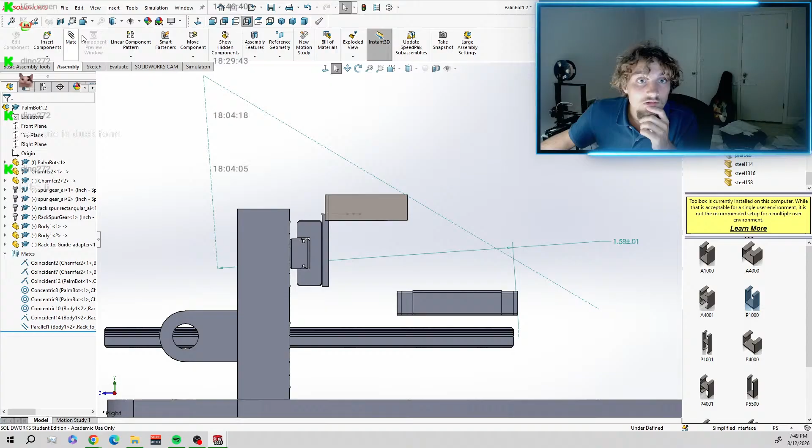Move component, please sir, please. Look at the way this thing's moving, man. Jeez, I actually forgot the way it's supposed to go. There, that's better though.

Alright, first let me free drag, then I'll center it up better. Okay, where the fuck? Where did it go? Obviously my center is all messed up.

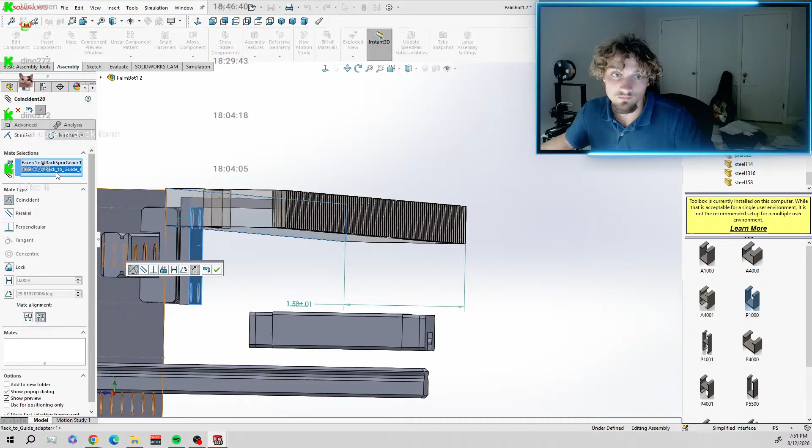That's really nice, I really like that. I really like that. And I really like that.

Why am I fucking pulling measurements right now? Why the fuck am I pulling measurements right now? There we go. Now we're getting somewhere, okay, now we're getting somewhere.

But alas, my time is up, and I must go beyond into different places. But there it is. Obviously we can add more of these guides because that doesn't really seem like very good structural support. So we can do stuff like that.

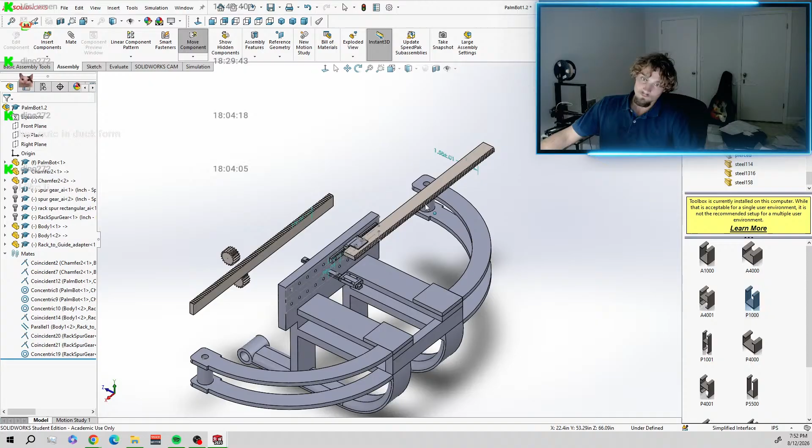Yeah, that can be driven by the motor popping up there. That should work out fine. We can drive those, get to there.

We'd obviously get a lot of flex here. But yeah, all right, there it is.

This is probably where we're gonna conclude it for today. I'd say there's a good bit of progress though, at least as far as getting the mechanical simulation down. Although we do need to define a couple more constraints. Obviously we can just slide right off the guide, but I think this is looking pretty good.

Looking pretty good. Let me start to put everything else together. Obviously, these...

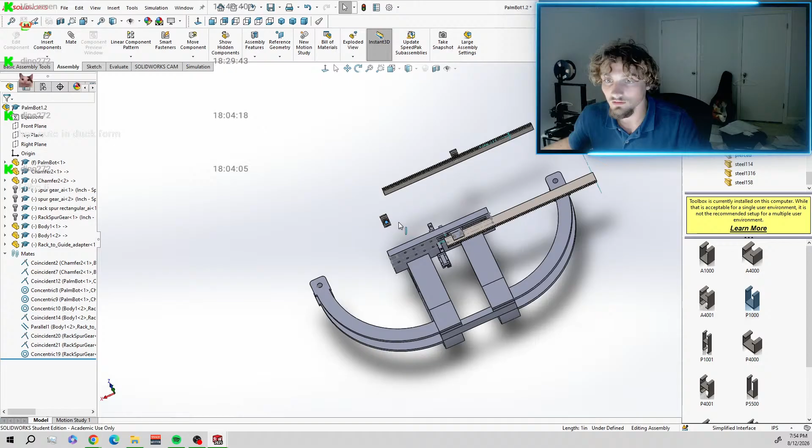Why is that moving? What the? What correlation do those two have to each other? That just doesn't make any sense to me. That's crazy, I can't even move shit anymore. There's some weird constraints that have been defined.

There, now I guess I can. Alright, but we're not gonna do that now, because I gotta go. It's cool to see it come together.